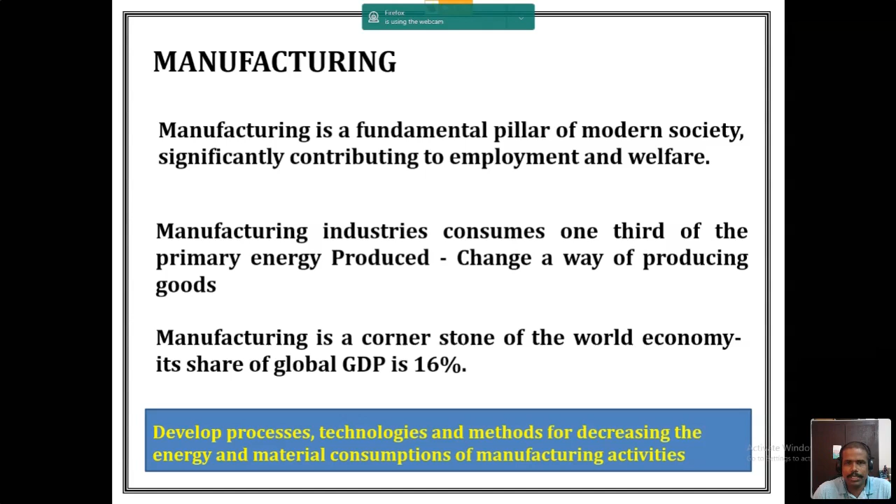So how are you going to enable this manufacturing to become smart manufacturing and carry out these activities in a seamless way? That is what we are going to see. And manufacturing has changed and it continues to change, right? From the beginning of the manufacturing shop floor, all the machines were mechanical machines, then we introduced automation through CNC, and now we are driving more towards personalization. That means everybody wants a model of their choice. That means your manufacturing shop floor has the capability to accept different models and manufacture them within the stipulated time, and that is a very challenging thing.

So to adapt to that personalization need, the manufacturing shop floor needs to adapt and change itself, not only by software means, but also by hardware means. So how this can be done in a smart manufacturing way, that is what we are going to discuss. And today if you look at car manufacturers, we are more into a kind of flexible manufacturing system. That means we want to produce a particular model of car in mass production, with sequenced production lines, fixed workstations, and a fixed hardware layout of machines to sequence the particular model of a car. If you want to change to another model, you need to change your sequence of operations, and you cannot alter the hardware setup of your manufacturing shop floor.

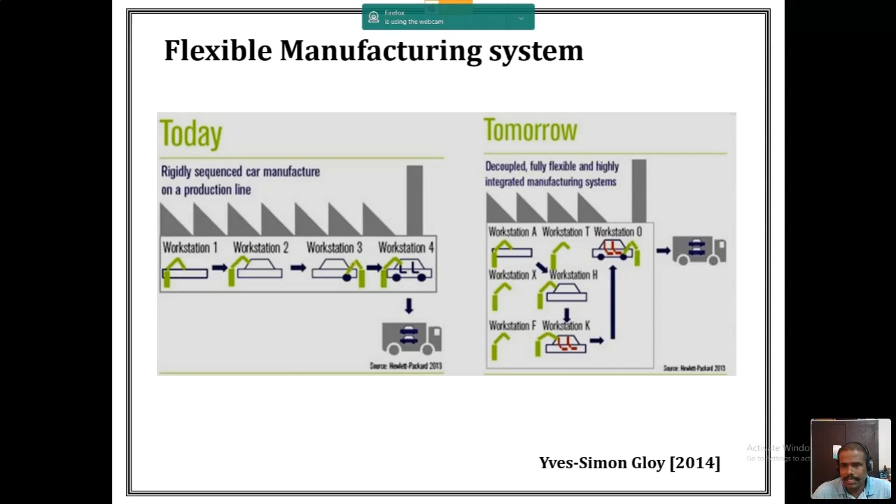And based on this, the new industrial model is aiming at, first, improving the non-labor resource efficiency. That means I want to automate and reduce the valueless activities within the manufacturing shop floor. I want to automate certain low-skilled jobs in order to make use of that labor for other work. And I want to invest in sustainable inputs. In the sense, I want to invest more money in energy production. I want to reduce energy wastage within the industry. And that enables creating new skilled jobs within the manufacturing organization.

And I want to commercialize these competitive advantages. That means I have improved my non-labor resource efficiency, I have invested in sustainable inputs. Now I want to make use of these 1 and 2 to take up the commercial competitive advantages, which are capturing new customers. And I want to conform to the quality requirements of the customers. And I have time to think about what futuristic products I can manufacture, and to create new business models, new business lines for my industry. So this is the new industrial model. And the bold aim here is to have zero environmental impact from its operations by 2020. Now we are in 2020. That means whatever business you do, you want to have zero environmental impact, right? That is the bold aim of the new industrial model.

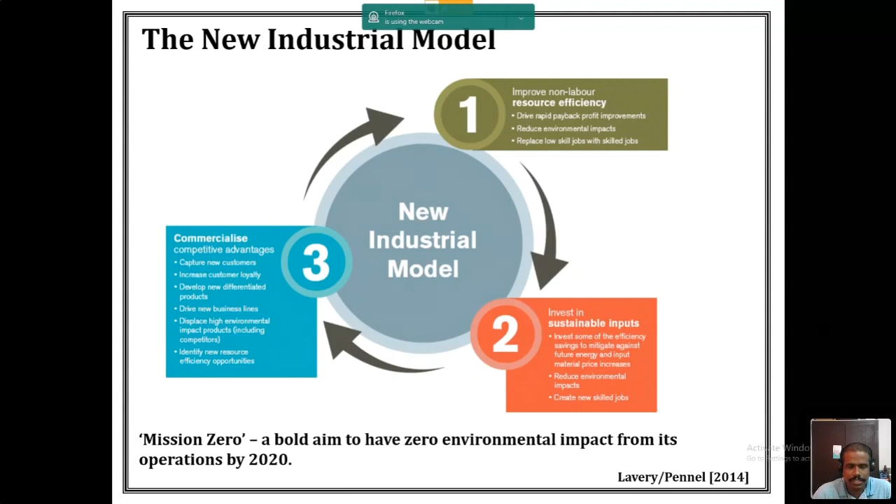And how is smart manufacturing going to enable this new industrial model to be practiced across different manufacturing industries, for improving the productivity and efficiency of manufacturing systems by reducing wastage? I want to improve the productivity, and it's very nicely said by Nobel Prize winner Paul Krugman: productivity is not everything, but in the long run, it is almost everything. A country's ability to improve its standard of living over time depends almost entirely on its ability to raise its output per worker. So in the current manufacturing industries, I want to improve the productivity. And in what way am I going to improve the productivity? What is meant by productivity? We will see some of the key enabling factors which actually improve the productivity.

One is delivering value to the customer. That means do the right things before doing things right. That is very important. And depending upon the demand, depending upon the requirement, you just prioritize the work, log, and act accordingly, and manufacture the products as per the customer specifications. That is conformance, and you wanted to produce quality. And by doing that, you are going to deliver value to the customer. It is one way of improving the productivity.

And in a manufacturing shop floor, you wanted all the processes to be under control. And one thing you need to remember, do not overload processes, equipment, or people, right? If you overload your processes, equipment, and people, then your uncertainty is going to grow exponentially. When your utilization is 100%, when you are stressing yourself, you will not be taking decisions properly, right? That is why your uncertainty is going to grow exponentially when your utilization is 100%. So ensure that you are not overloading your processes, equipment, and people.

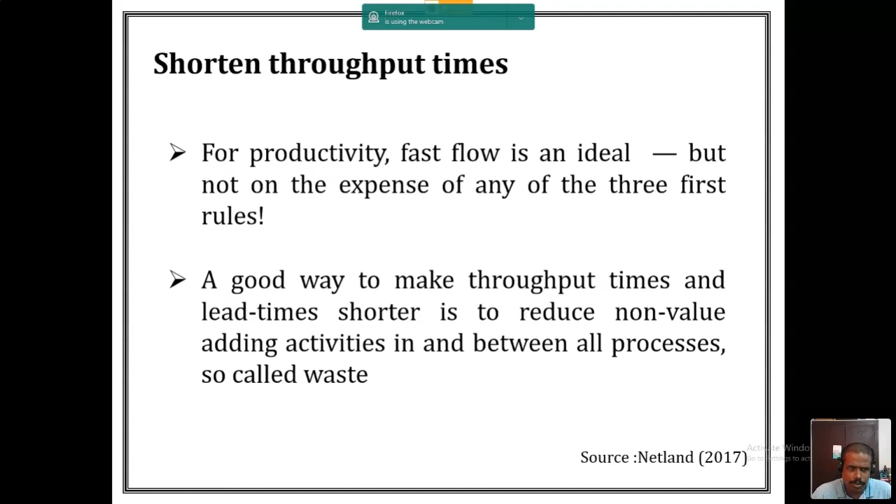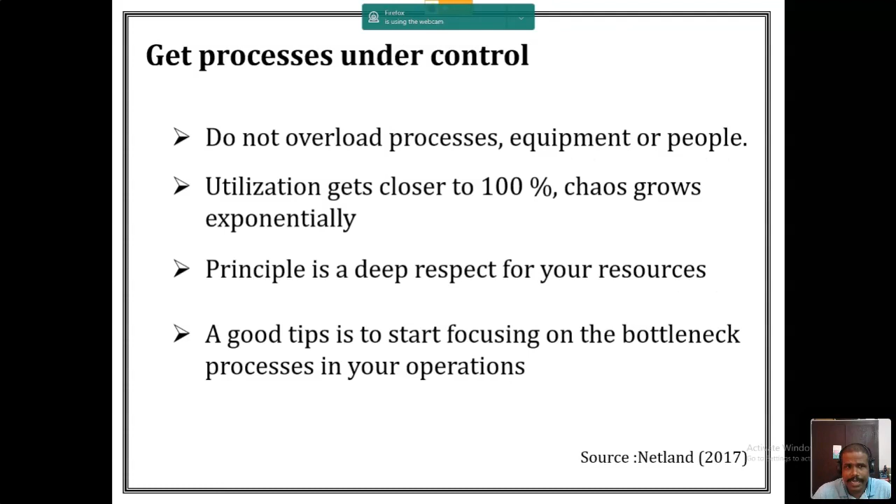Now, to improve your productivity, I wanted to introduce smart manufacturing. Smart manufacturing is going to improve the productivity. How? One is delivering value to the customer. Second is get processes under control. Is smart manufacturing going to do this? Yes. How? We will see that. Synchronizing processes as a system, and it is going to shorten the throughput times, and it is going to continuously improve. That means the manufacturing shop floor continues to learn and update the knowledge.

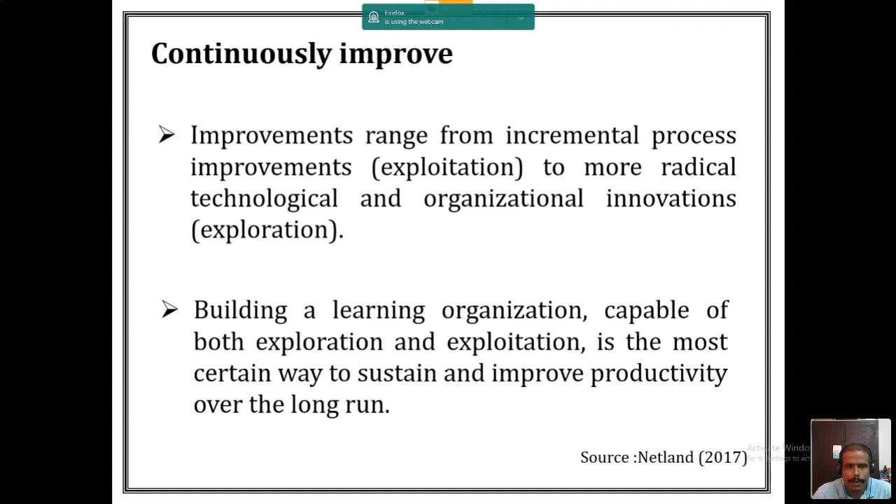Updated knowledge will be utilized to continuously improve your production processes. And so this is the need. This is the current requirement of every manufacturing industry, aiming at improving the productivity and energy efficiency without compromising on the quality of the component produced, without any impact to the environment, right?

If you are going to manufacture a product, what does it impact? How much carbon footprint is the manufacturing of this product going to give to the environment? I need to have an assessment even before I am planning to start a manufacturing organization. That is the current trend, right? So now we look into smart manufacturing, right?

Smart manufacturing: one thing is we now have information technologies, and information and communication technologies growing like anything. Every person has a mobile, and your communication platform is well laid. Now you want to make use of these information and communication technologies to effectively, efficiently operate your production machines, manage and control the machines in order to improve the productivity and energy efficiency of the production system with the least environmental impact. This is what smart manufacturing is about.

So it uses real-time information in manufacturing processes by the original equipment manufacturer, with suppliers, leading to a whole new level of visibility throughout the supply chain, from the concept to the end of life of a product. Even after the end of life of a product, how am I going to recycle it, what is its environmental impact, right? Every activity of a component manufacturing, a part manufacturing, a product manufacturing company needs to be visualized even before you are starting a manufacturing industry in reality, right? That is what smart manufacturing is going to enable.

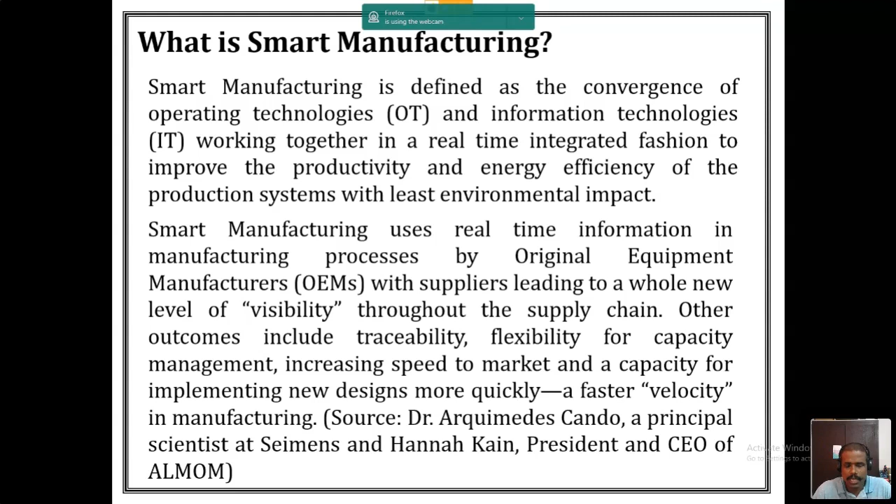So in India particularly, we actually have much more matured software technologies, and now manufacturing technology is also evolving, and it is the right time to make a jugalbandi of our IT skills along with manufacturing in order to improve the productivity and efficiency of your manufacturing systems, right? Ultimately, by doing that, you are going to do your business more effectively without any environmental impact.

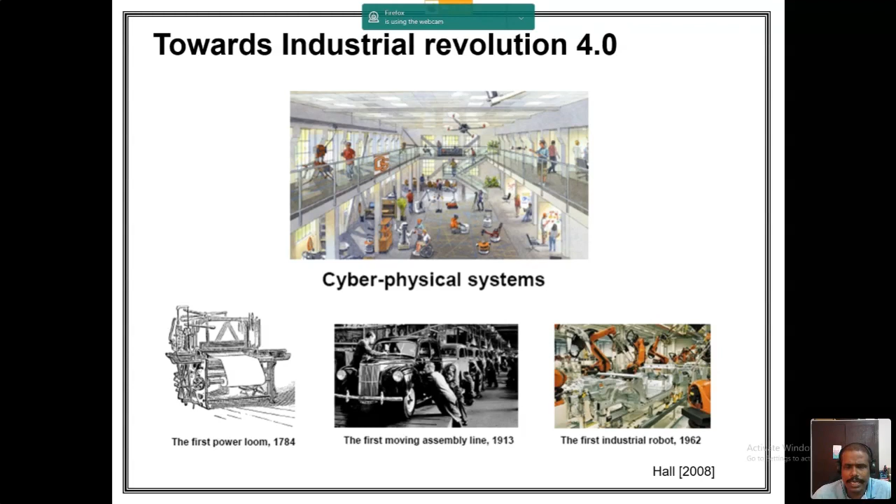And a machine can talk to all other connected equipment integrated in a manufacturing shop floor for producing the components as per the specifications without compromising on the quality and without affecting the environment. I want to make use of every machine to its maximum productivity, maximum efficiency. That is the role of smart manufacturing and so-called Industry 4.0 realization. So this is how we were moving towards Industry 4.0. It is a very broad topic to discuss.

Some of the important key definitions you need to know about Industry 4.0 is IoT. IoT is connecting sensors with your physical system, collecting the data and presenting the data. It ends there, Internet of Things ends there - collecting data, presenting data, that's all.

Now digital twins make use of this data in order to understand your processes, understand your machines, and how these machines work in a manufacturing shop floor, how each and every critical component of your machine tool is functioning, what is its status, when to do maintenance, can I forecast the failure. Based on that, if I could be able...

to work with the data collected using the sensor, data is converted into information, information is converted into knowledge. I wanted to make use of this knowledge to control - the control can be human or it can be automated. Digital twin control is you can optimize the processes, you can forecast how the system is going to work, but it may not require that you need to control. Automated control is not part of digital twin.

That is the differentiation between digital twin and cyber physical system. When it comes to cyber physical system, you will be having a control, automated control. Based on the information which you are gaining, you assess the information and take decisions, make use of these decisions to enable the controller which in turn will reduce the speed, feed, depth of cut to make the production continue to produce the component as per specifications. Whenever there is a process deviation, it can be corrected. Whenever a particular component is malfunctioning, that component will be replaced, or I will be using that component without its maximum capacity, making it usable for some more time. That is all possible with cyber physical system.

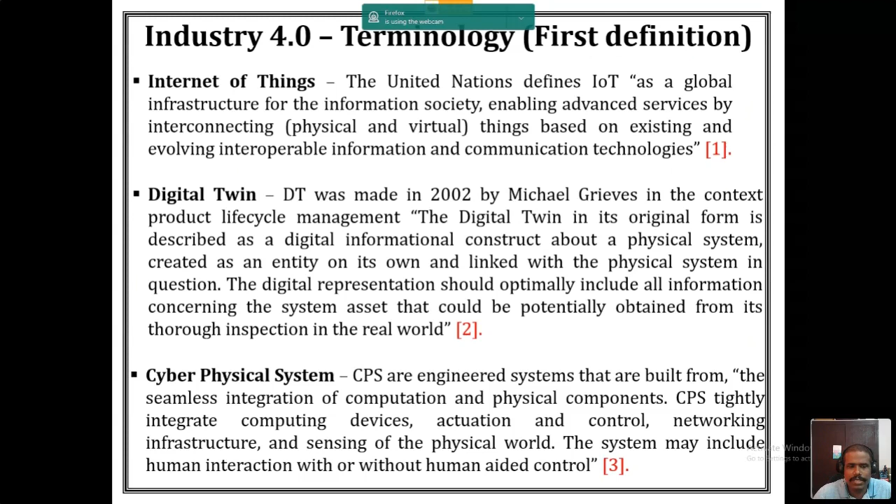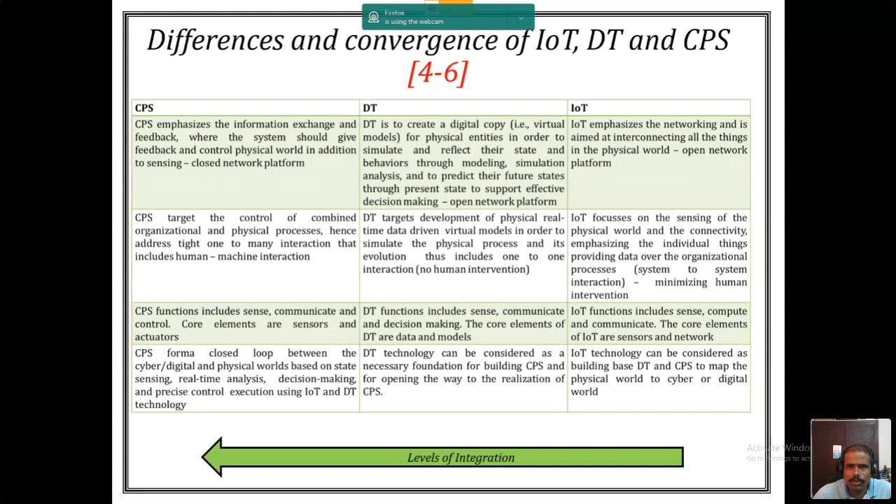So now we have learned about the different concepts of digital twins. We discussed what is smart manufacturing, explained smart manufacturing in the Indian scenario, and we have a long way to go, but we have more inclination than other countries in enabling smart manufacturing in our industries, and this is the right time. We discussed why we move towards Industry 4.0, its different elements and terminologies—IoT, digital twin, cyber physical systems, and the 5-tiered CPS architecture—and the difference and convergence of IoT, DT, and CPS, and how this enables Industry 4.0 and the concepts of digital twins.

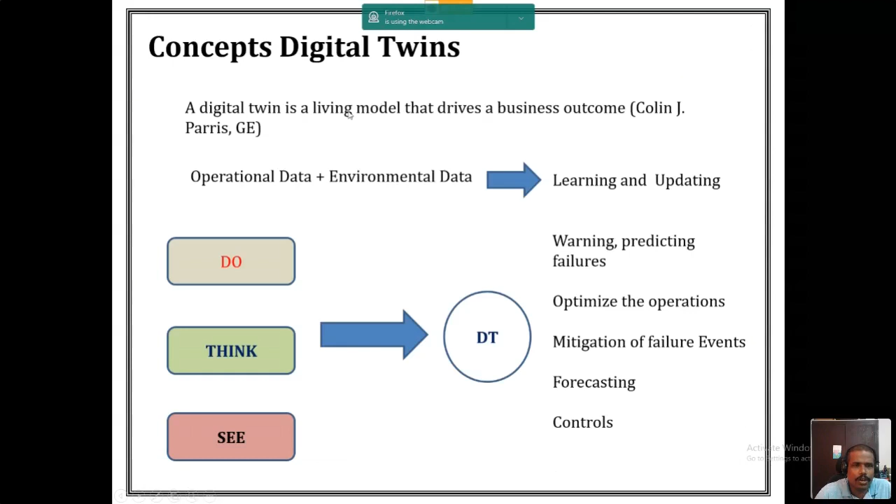We discussed it as seeing, thinking, and doing. That's why it is a living model—because it thinks over and also acts upon the processes.

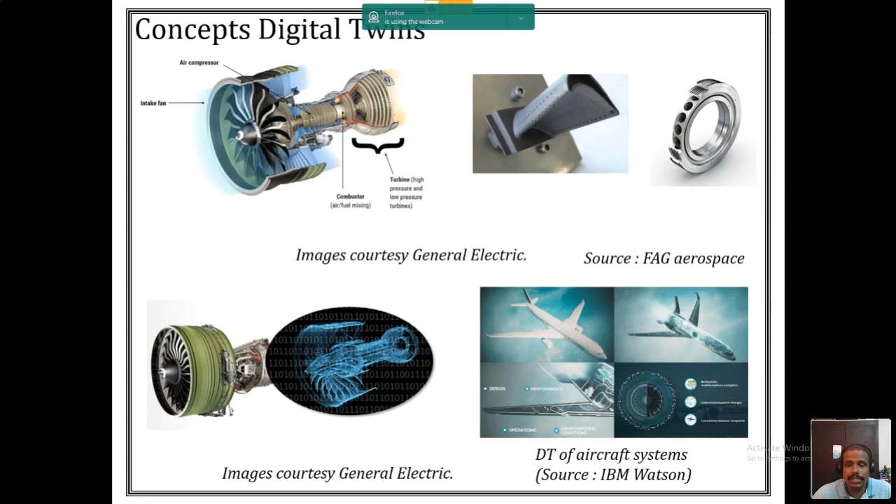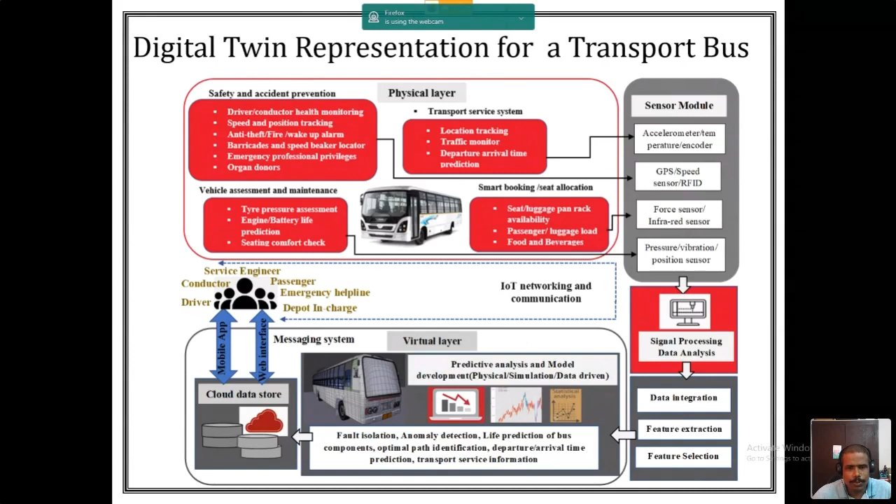Transport bus is just enabling a practical scenario where we can use digital twin in manufacturing. Now, finally, in an elaborative sense, what does the digital twin consist of? It consists of all these blocks where data and physics are utilized for diagnosis and prognostics of every system, for improving its operational performance.

Now we will see some examples of digital twin realization. This is the work of my PhD scholar, and we have a digital twin as an information sharing platform for smart manufacturing. What is this all about? The grinding wheel. We have created a grinding wheel digital twin, and we have given it pre-product knowledge. Digital twin is a software platform, please, again and again - it's a software platform.

Now, suppose somebody wanted to select a grinding wheel for a particular material and particular operational strategy - how will you select a grinding wheel?

That knowledge we have incorporated as software along with the grinding wheel digital twin. That is called product pre-knowledge. It is coming from the manufacturers: what is the kind of abrasive, what is the kind of bond material, what is the bond volumetric percentage, what is the abrasive volumetric percentage, and the physical properties of the grinding wheel, saved as pre-product knowledge.

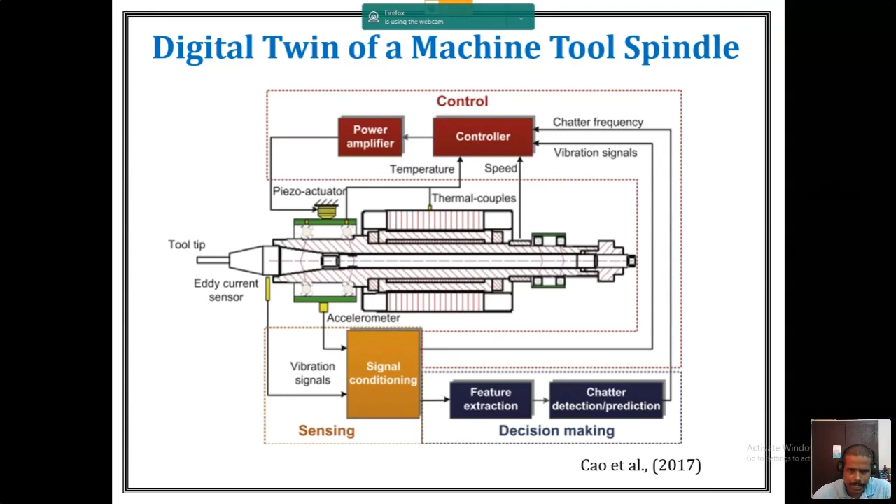This is how the digital twin of a machine tool spindle looks like. It's work by Cao et al. in 2017. They have published a paper in CIRP Annals of Manufacturing Technology. And so if you look at it, you have a torque sensor, temperature sensor, current sensor, displacement, flow rate, vibration. These are all sensing.

Now you have decision making: thermal error, unbalance, damages with the bearings and other components, tool wear, breakage, chatter, collision of your spindle, tool tip. All these things you have calculated or estimated from the data which you are getting, as well as the physical models. And now the decision is made, and the decision is going to enable your controller.

The controller is going to compensate for thermal error, active balancing control, and it is going to enable as well condition-based maintenance, right? So the control will be done by the embedded actuator with the machine and the CNC system, and as well the operator can work on the machine in order to reduce the chatter, to bring back the production process effectively to produce the components, right?

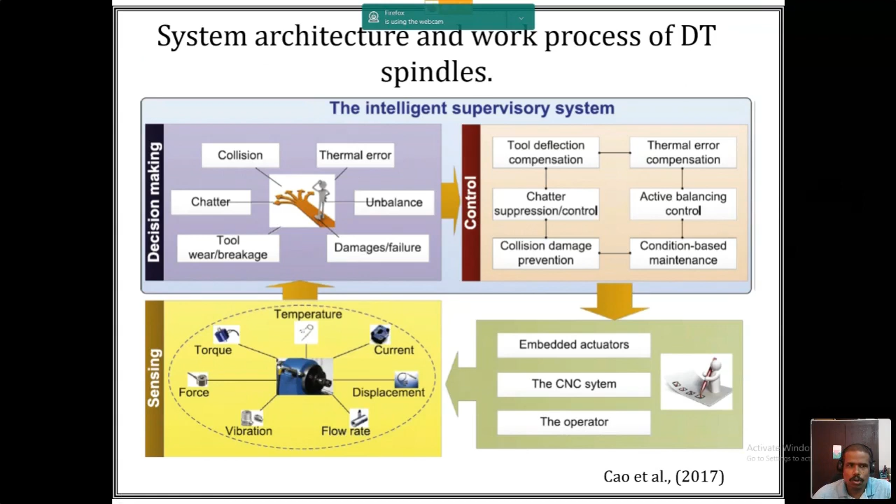The discharge is going to create shock waves, and the shock waves are going to come and hit the tank. I am going to pick up the shock waves hitting the tank and process them to understand the process. More the shock waves, the process is more effective, and that will help me understand whether the chosen electrode is correct or not, and what the thermophysical properties of the workpiece are. All this information I could get from this sensor data in order to improve the performance of the process, ultimately aiming at improving the productivity, right?

And this is the acoustic emission signal, and

I don't know how much time we have. Please, you can go ahead, sir. Okay, thank you.

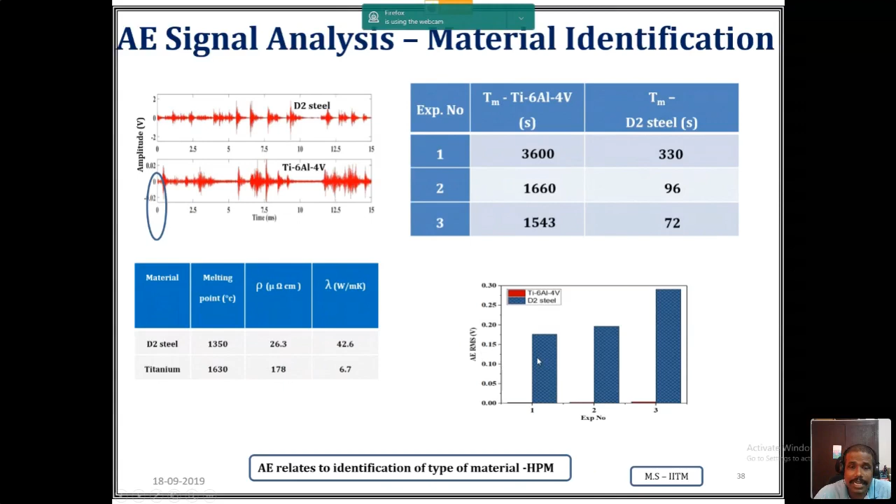Also, I can use AE to identify what material I am actually machining, right? When you have an AE RMS value, look at it for the titanium and D2 steel under different processing conditions. The AE RMS value for your D2 steel is higher than your titanium. Titanium exhibits poor machinability in terms of electrical discharge machining. So by utilizing this information, I can understand what material the machine is processing.

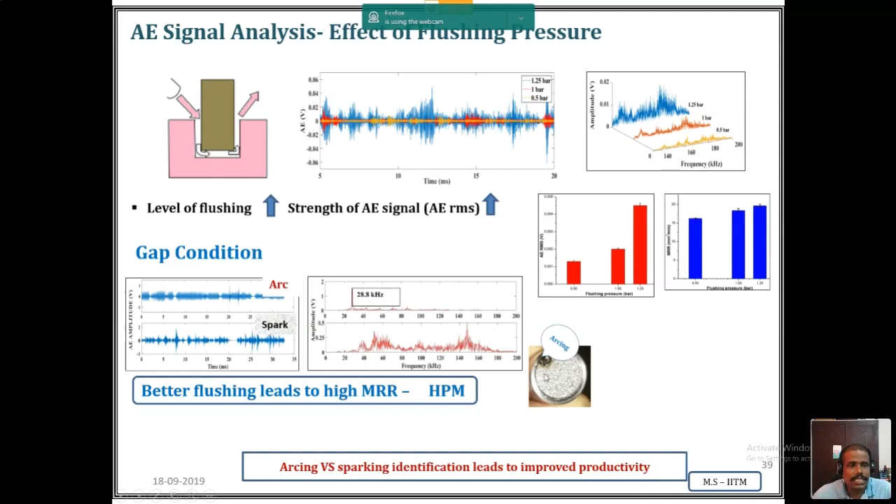This is just using an acoustic emission signal. I can understand and confirm whether the selection is correct or not. So this improves the productivity. So the AE signal is utilized to understand the process mechanism more effectively, which in turn leads to productivity improvement. So I can say this is a digital twin, but it is a process digital twin. This is a reference you can refer to. We have a publication in this area, investigation on the effect of EDM process variables.

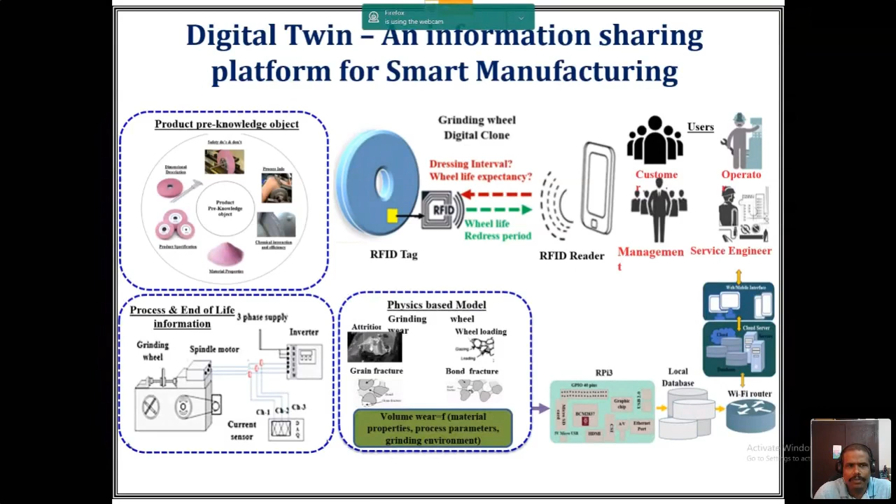And now these are two examples. So we have shown a grinding wheel digital twin, what we have discussed. What we have done in IIT Madras: we have created a digital twin of a grinding wheel, and how this enabled a smart manufacturing initiative.

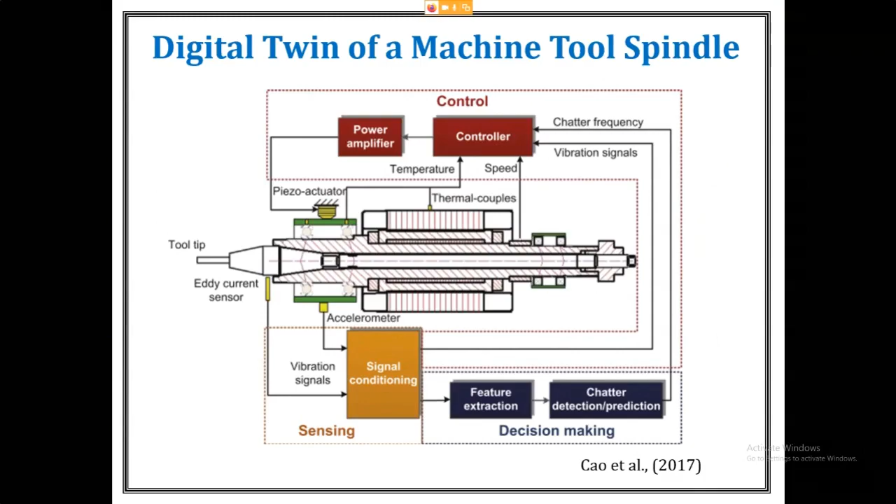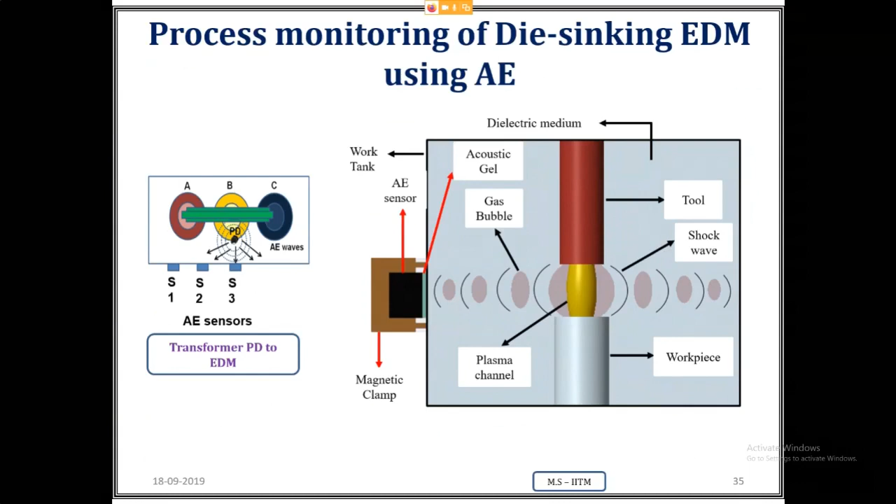Also, we have a digital twin, and it's not our work, it's the work of Cao et al., a digital twin of a machine tool spindle, and we have process digital twins. Like this, we have more articles and more work we have done in this area. Considering time, I'm presenting only selected articles for you to learn.

So now, what are the challenges we have in realizing Industry 4.0? We need a lot more people coming together to work as a team in order to realize Industry 4.0. Not only academicians; industry people have to come together along with academicians and researchers, because you need a lot more big data analytics. You are going to deal with the data: volume of data, velocity of data, variety of data. You are going to deal with big data.

You need autonomous robots. You need a lot of simulation studies, and you need to integrate organizational level changes for realizing Industry 4.0. Even many of our industries don't have CNC machines. They still make use of manual machines. Can I not do Industry 4.0 for manual machines? Yes, you can do. Who said you cannot do?

You can do, but the level of integration will be the top first two levels of integration, right? You may not have very effective control, or you can retrofit and convert your manual machines into CNC machines and realize Industry 4.0, right? All these technologies are needed for realizing Industry 4.0.

And what challenges? You have lack of unified leadership, coordination is difficult within the company. In one company we visited, we wanted to implement IoT, and even the machinists who work on the machines were really suspecting what these people are going to do, whether they are going to monitor how much I am working with the machines. It is not that. We are actually going to monitor the machines, how they are performing. And not only that, even how effectively people are utilized within the manufacturing shop floor is also a role of Industry 4.0.

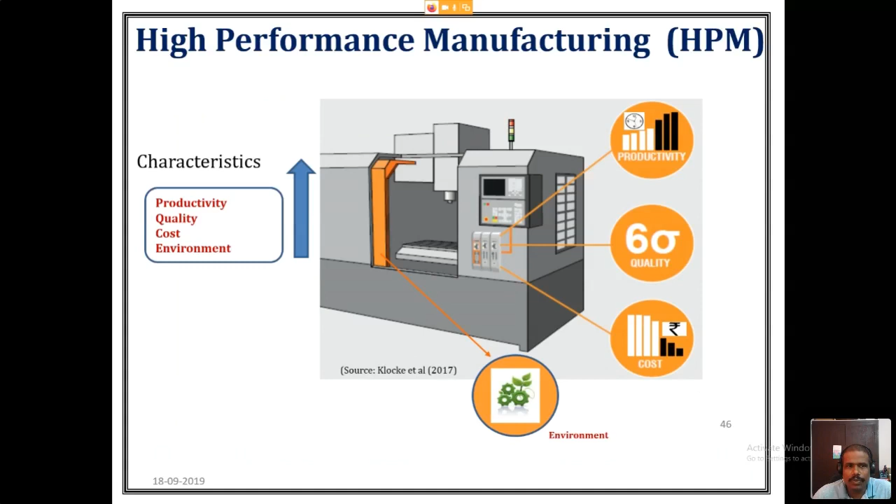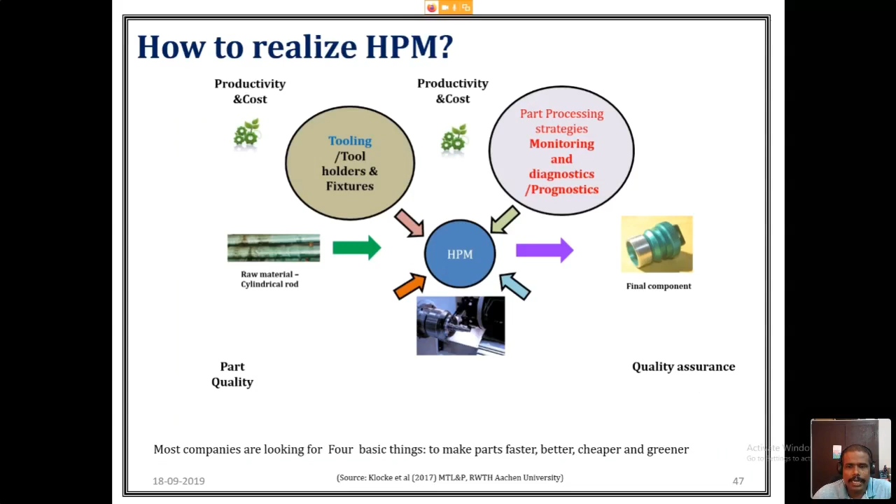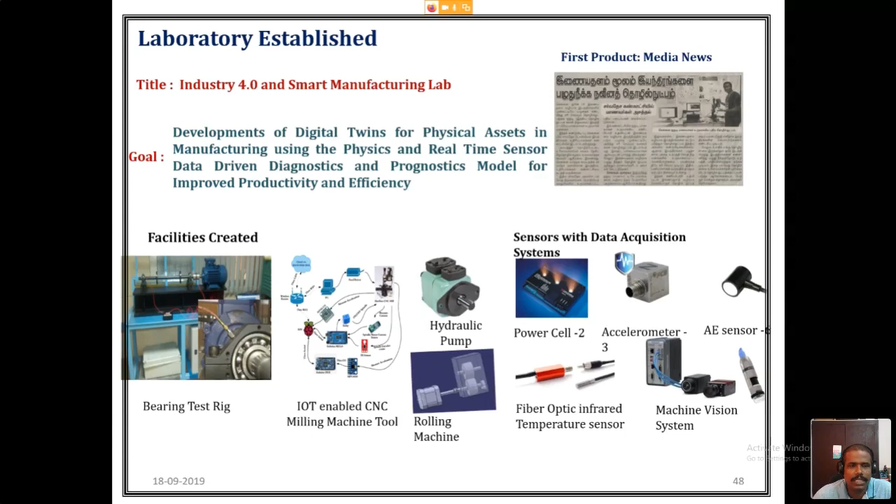And in research at IIT Madras, this is the research we do, mainly on high performance manufacturing, to improve productivity, quality, cost, and environment. We work on tooling, monitoring and diagnosis, machine tool drives and bearings, and metrology as well. And this is a lab we have at IIT Madras in the mechanical department, in manufacturing engineering. We have an Industry 4.0 and Smart Manufacturing Lab. These are all the enabling technologies and products which we have developed as digital twins.

And the future research direction is the smart factory. I told you I wanted to operate the whole manufacturing activities by sitting at home. It's possible, we can realize this, but it's a long way to go. Don't think IoT is Industry 4.0. Please, it's not that. I wanted to provide intelligence. I wanted the machines and systems to be adaptive by getting the data. It's not that easy.

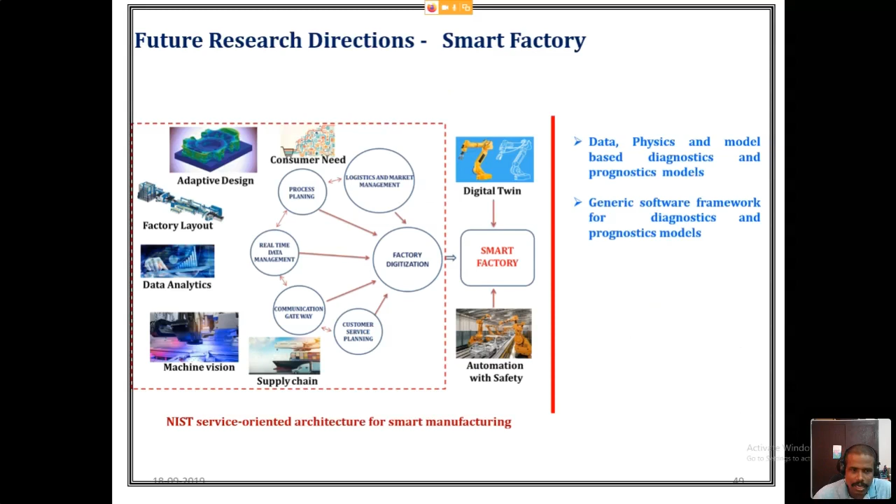So far in the discussion, we are talking about data. For data, you need clean data. Clean data will enable you to develop these models very easily. But when you have data which is sparse, unclean, discontinuous, how are you going to deal with the uncertainty of your data? These are all challenges.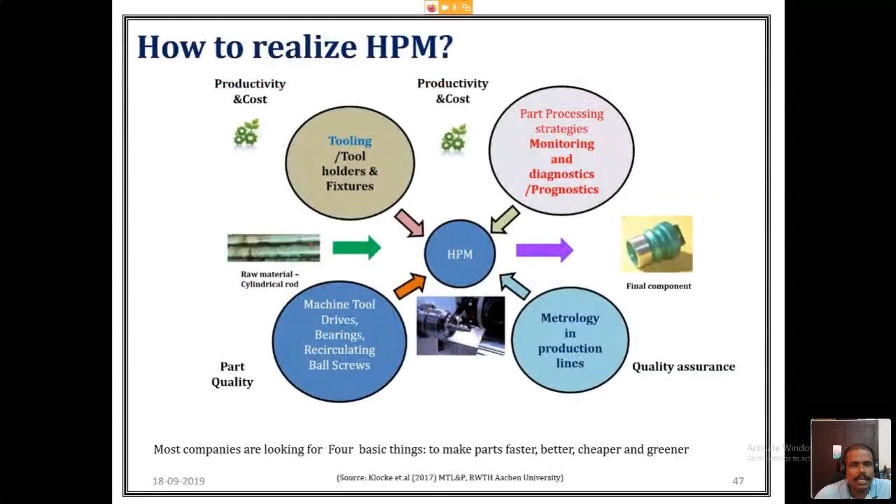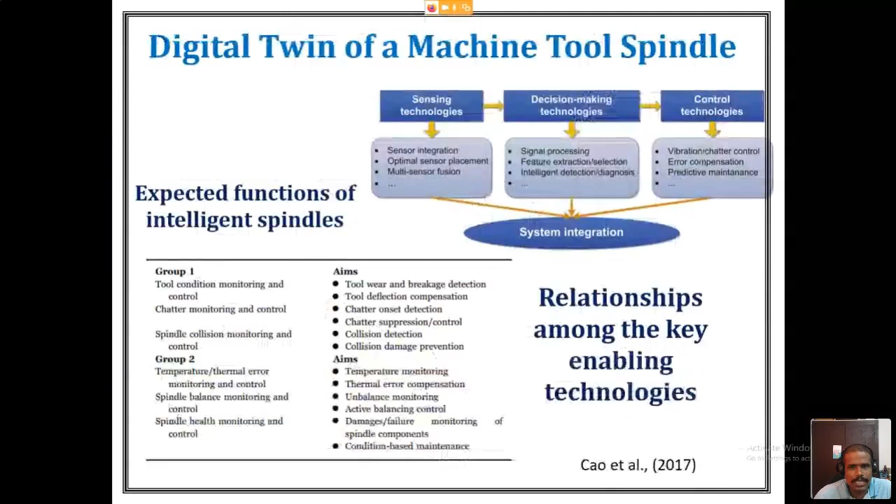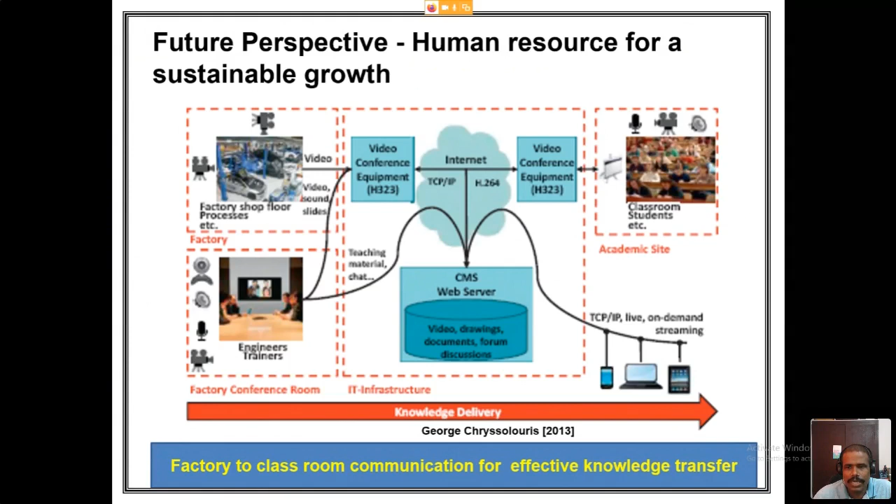And this is the final message with which I wanted to complete. I am an avid fan of Mahakavi Bharathiyar, and I hope you all understand Tamil here. Very nicely he put forward his thoughts in this poem.